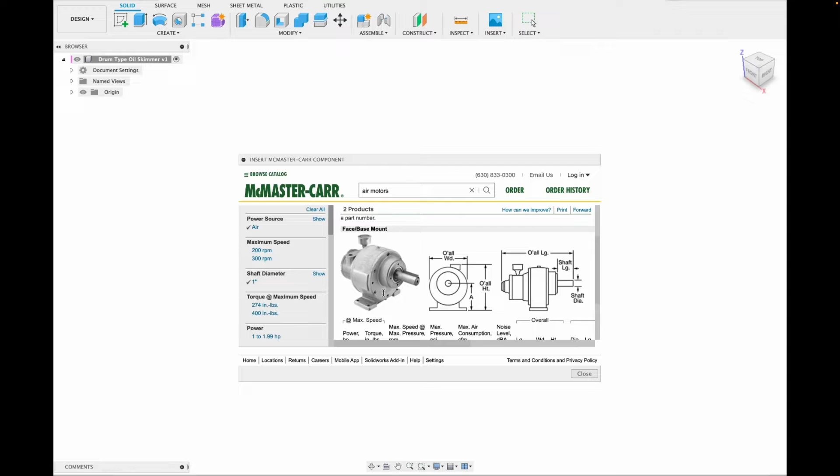So let's get started. I'm going to start off by bringing in an air motor from McMaster-Carr. I like to bring in parts, SAT files from their website. That way you don't have to model every nut, bolt, screw, etc. There's also other online libraries that you can use to bring in parts or components to speed up your iteration design process.

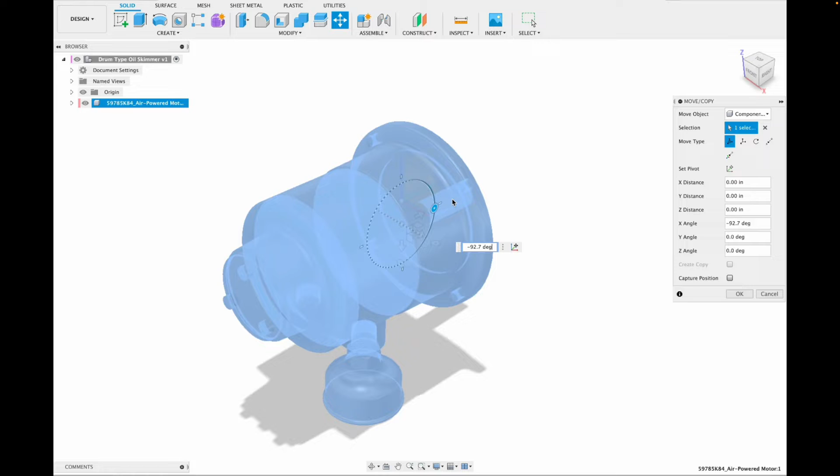So I'm just looking at the specs of this one. So yes, it is available as a SAT file. We'll bring it in, orient it how I want it. Obviously, we want the muffler at 12 o'clock. In the render tab, I'm going to go ahead and paint it just so it pops on the screen more. Like a glossy blue for now. And I'm going to paint the muffler black. Go back to design.

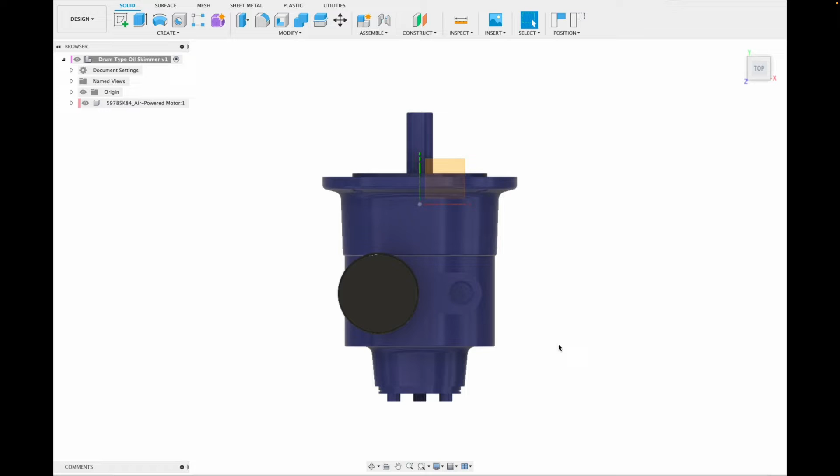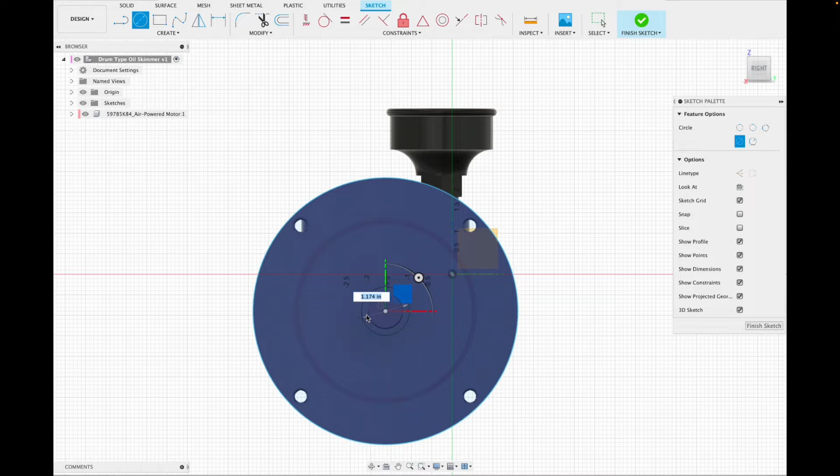I think I need to reorientate this air motor. And create a sketch on this face. What I'd like to do is create the actual metal mounting plate that this air motor is going to bolt to. Then we need to leave a circle for the shaft to go through the plate. Just taking a measurement. And create a rectangle using the center point. Pull out my rectangle. And we get 16 inches by 4 inches.

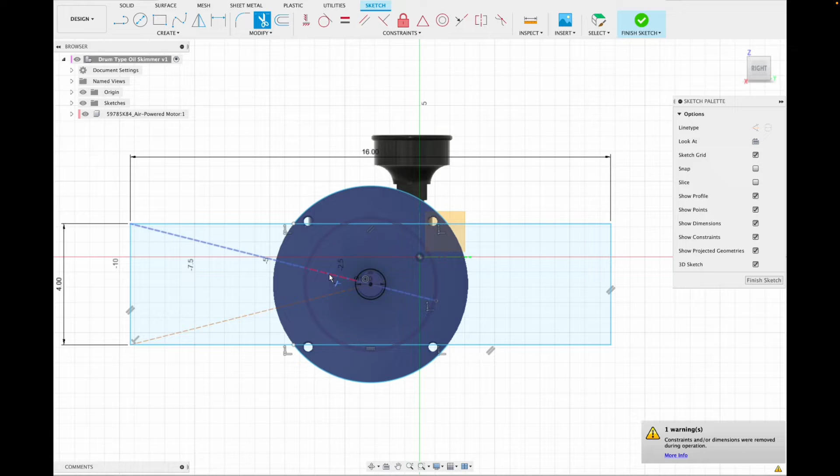And then using the trim tool, I'm going to remove my lines that I don't want. Excuse me. Then we'll say finish sketch, extrude. I'll select the parts we want to extrude, and we want a new body. We want it to be 0.25 inches thick. So there's our mounting plate. There's our mounting holes. You can see they're already pre-threaded.

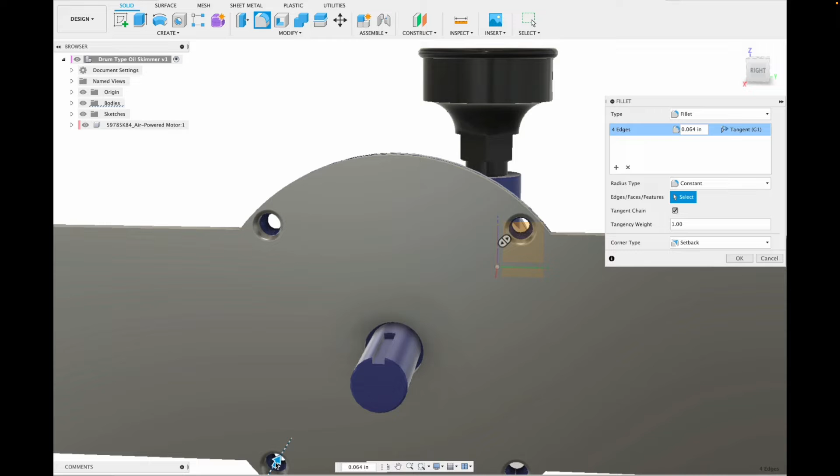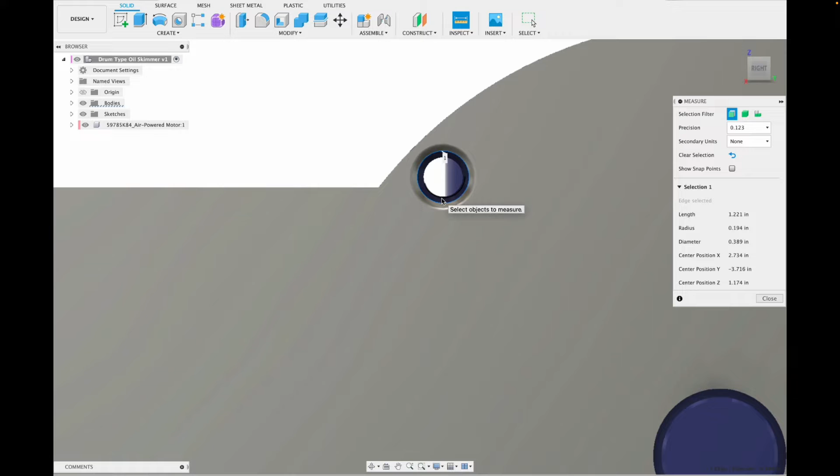I was thinking I may use countersink screws to mount the air motor to this mounting plate. Just taking a measurement. And then I'll bring in some mounting screws again from McMaster-Carr. They don't need to be very long. Flathead. Do hex drive. Because this will be exposed to water, I prefer them to be made out of stainless steel. See, they offer different sizes, different finishes.

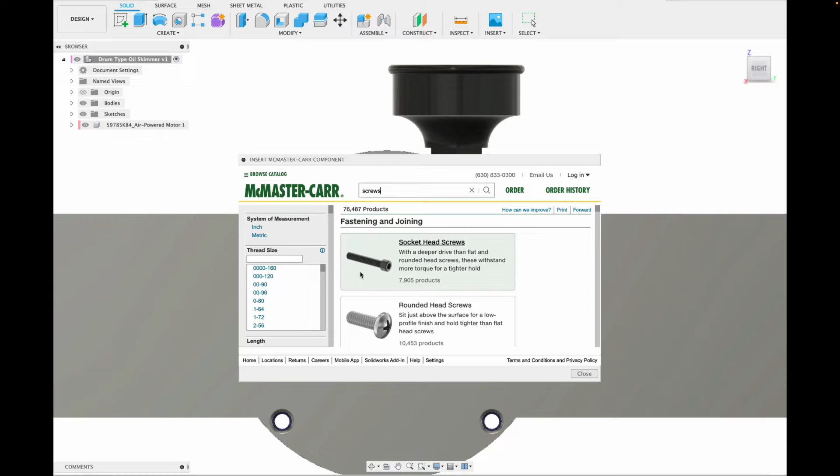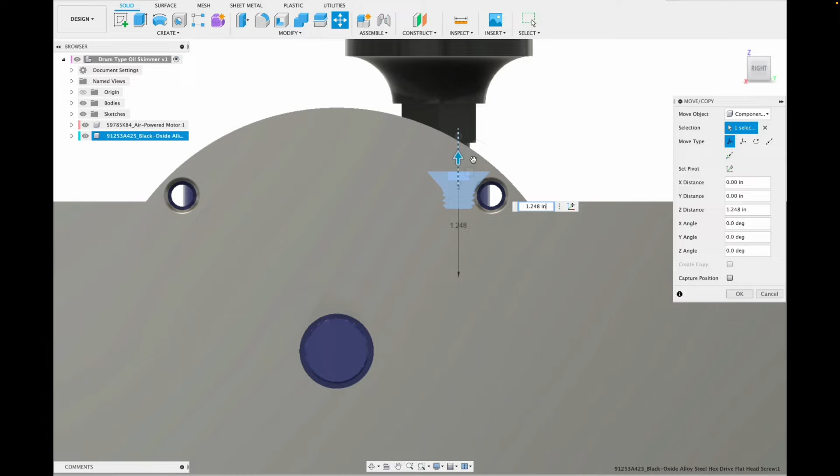That looks good. A little bit longer than what I want. Oh, and that's going to be too big. Let's delete that. The other thing I'm noticing on our mounting plate is I'm thinking there's not going to be quite enough meat or thickness between the edge of the mounting plate and the edge of the mounting bolt head. I'll show you what I mean here in a minute. So for example, even if we try to use this screw, you see how the screw is going to stick out over the edge of that mounting plate? That's no good. So we're going to have to go back into this sketch.

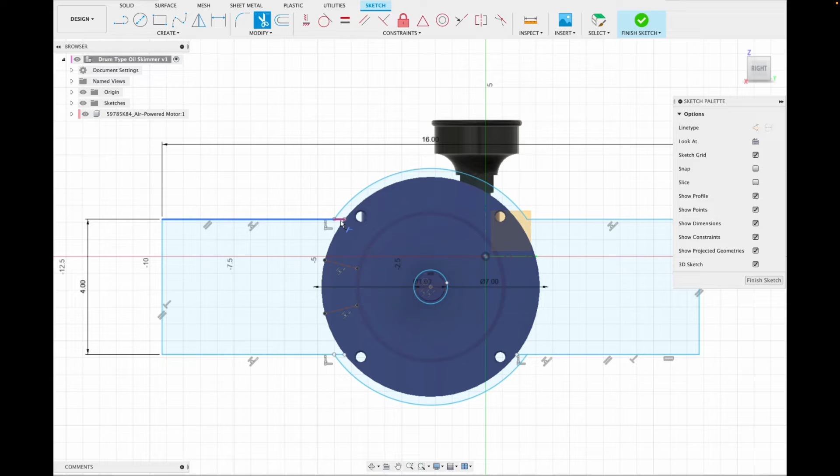See, edit profile sketch. And I'm simply going to add a larger circle to give more material there for the bolt head to tighten against, and then use the trim command to remove those lines and arcs I don't want. Finish sketch. Turn my sketch on, and then say extrude. And this body will delete. Now we can extrude. And again, I want new body, 0.25 inches thick. That looks better. You can see we have more material now for a bolt head to tighten against.

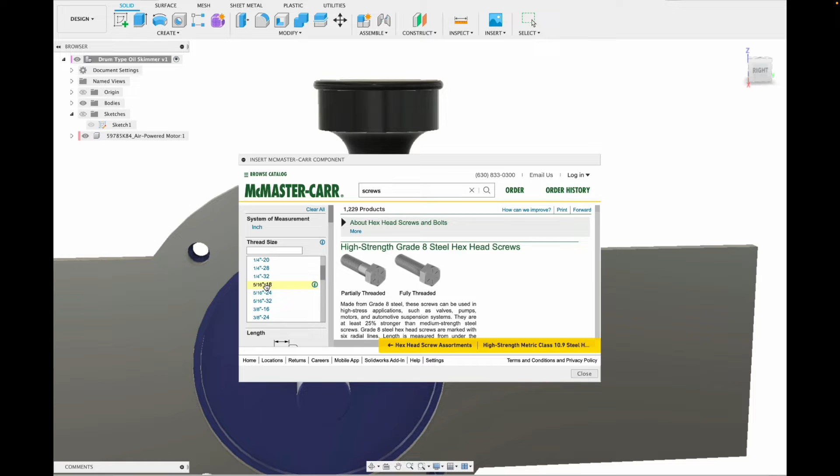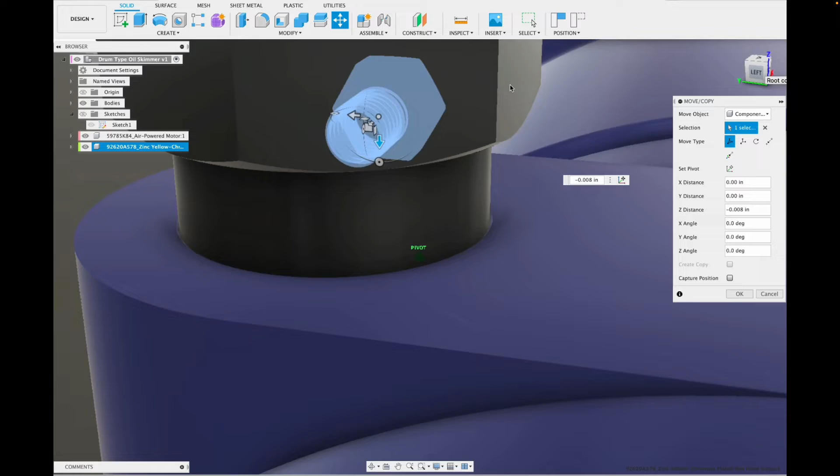And I'm just going to bring in a standard hex bolt. Yeah, that looks better. So we'll see how this looks. Yep. You probably could have grabbed one that's a little bit longer, but for this demonstration, you get the idea.

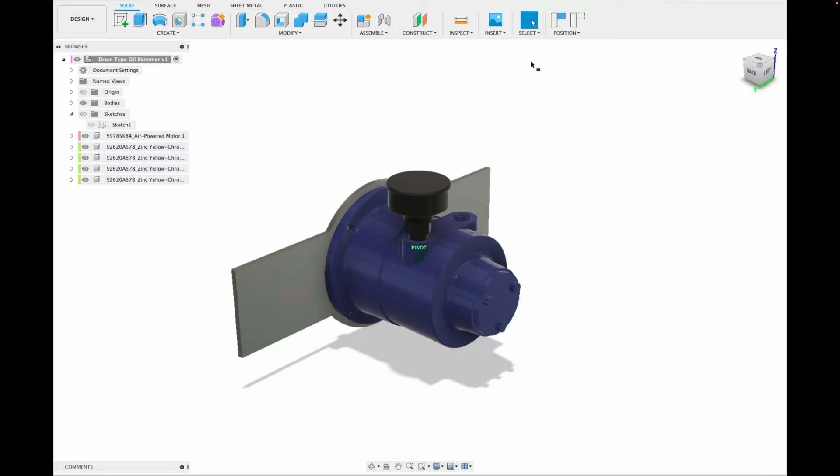Then we'll grab this one bolt and say create copy, move our copy over, get it aligned where we want it, say OK, and then we'll grab both of those two bolts and say create copy, drag them down to the other two mounting holes, and now our air motor is mounted to our mounting plate. That looks like it'll work just fine. Just taking some measurements now of the drive shaft and the keyway.

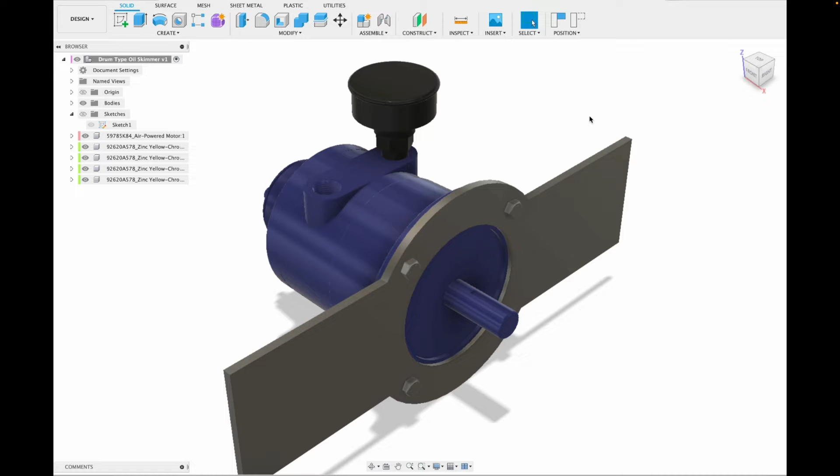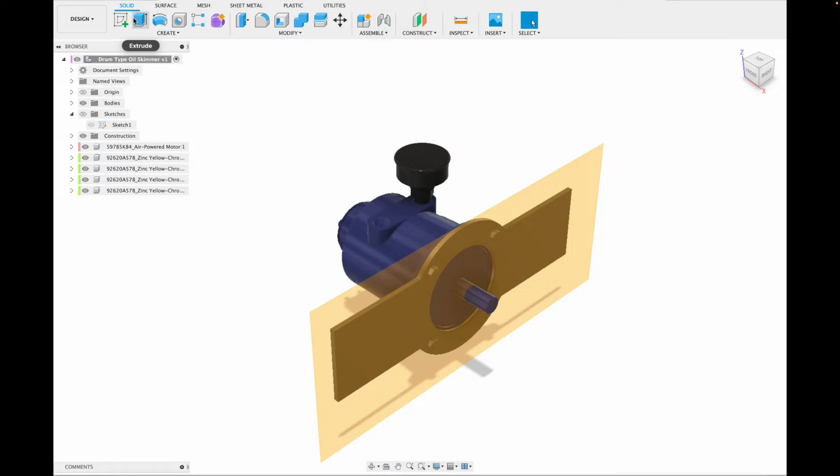Constructing an offset plane. And then I'm going to create a sketch on that offset plane. And we're going to extrude out our actual drum. So go over to Create Sketch, click on that offset plane. And we obviously need a hub with a socket that will accept the drive shaft. Extrude that out. So you can see that's how we'll connect to our drive shaft. Say new body. Okay. I'll create a sketch on that face.

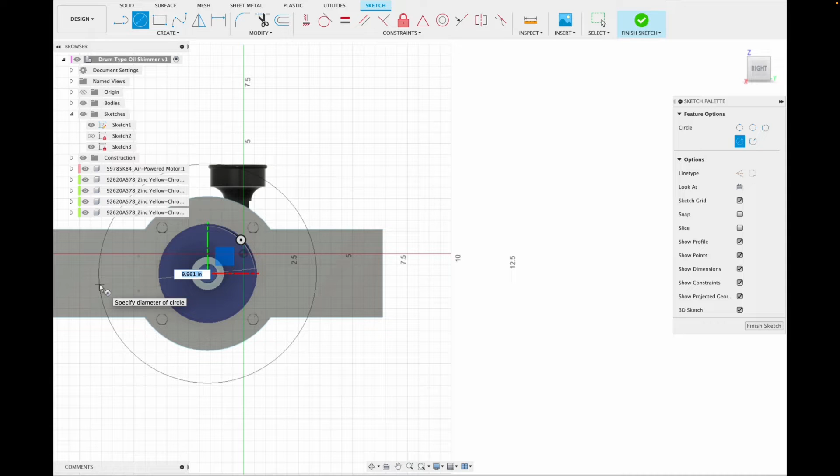Create a circle. And this will be our actual oleophilic material, the actual drum that will spin slowly on the surface of the water, and the oil will stick to the drum as the drum rotates. And that air motor is what's going to rotate our drum. Like 15 inches long. I think I'm happy with that. And later on, we'll go back and add some reinforcement gussets to that hub, between the hub and the drum.

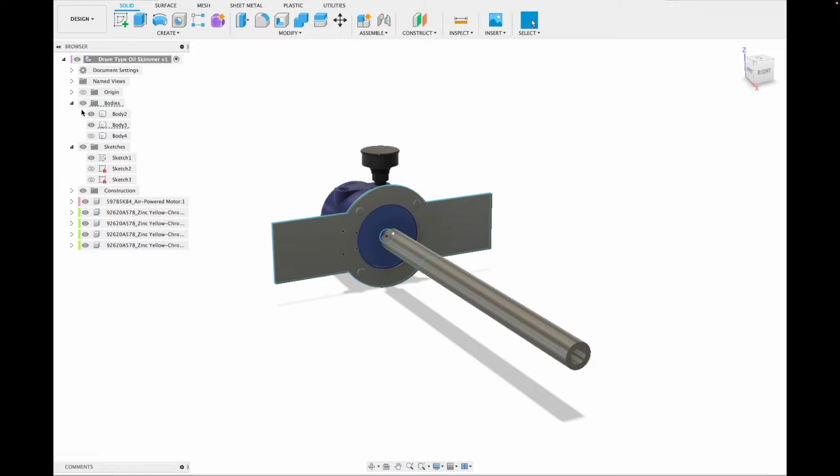I'm just going to extend that out so we have it poking out the other side. And on the other side, it's just going to be attached to a pillow bearing block. Add some color to it. This could be made out of stainless steel, polypropylene, some sort of plastic that's oleophilic. Continuing on, just taking some measurements. So you can use the extrude or press-pull command to shorten that hub. Say cut. If you see red like that, that means cut. So yeah, I think I'm happy with that.

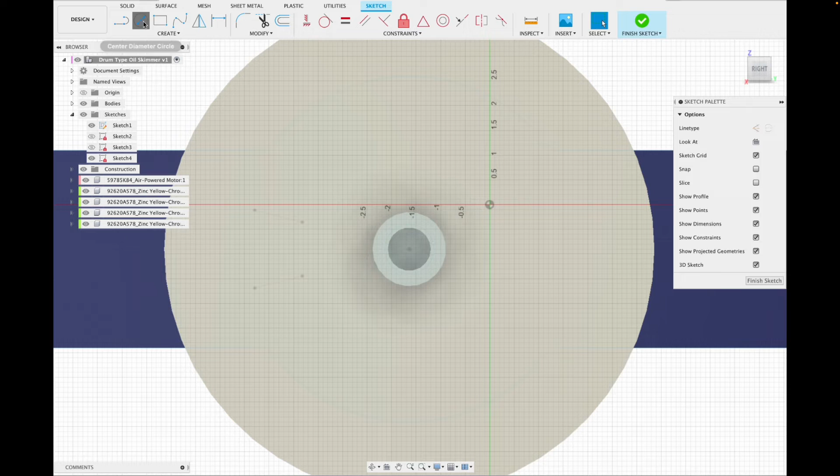I'm going to create a sketch on this face. And what I'm doing now is creating a shaft that will go through the pillow bearing block, because this is just the idler side, it's not the driven side. I'm simply going to copy this body to create my other mounting plate on the other side. There we go.

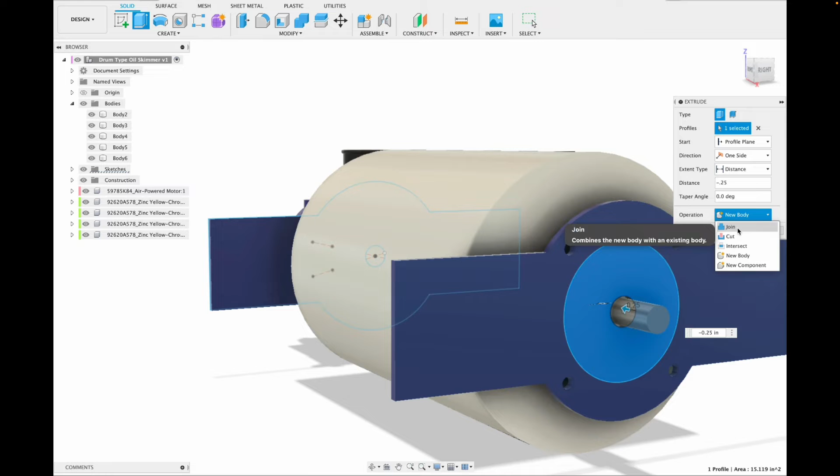Create a sketch in a circle, slightly bigger than the shaft to allow the shaft to go through. Then we'll fill in the larger circle. We'll use the extrude command, and at this point we'll say new body, 0.25, join. There you go.

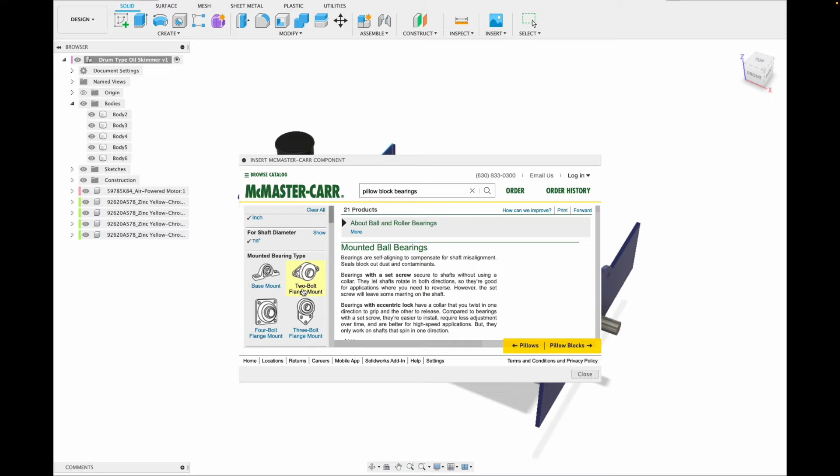So now we'll bring in our pillow bearing block, ideally made out of stainless steel, sealed bearing. We don't want water getting in. We'll orientate it how we want it.

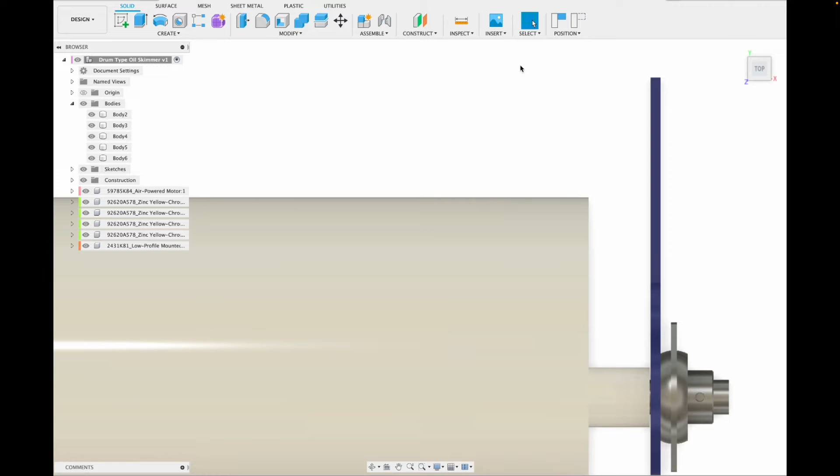Need to move it in slightly. There we go. Say okay. And then under the render, we're going to paint that pillow bearing block green for now, to make it pop on the screen.

I want to chrome plate our shaft and our Allen set screw. Yep.

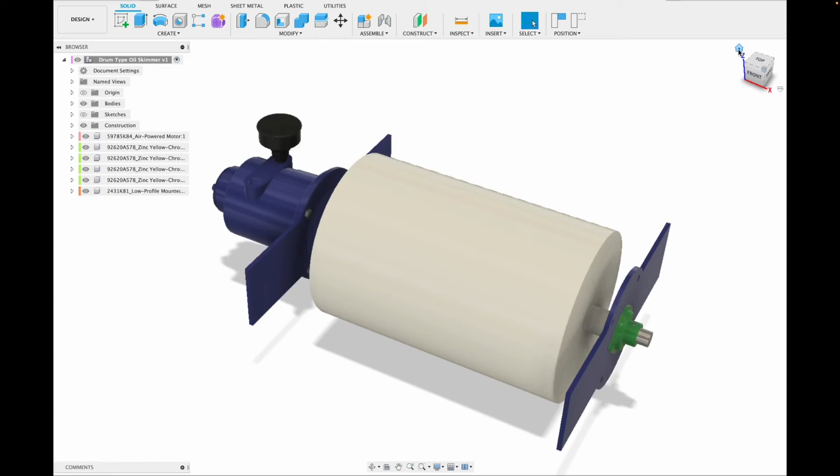Then we'll bring in 2 mounting bolts to mount the pillow bearing block to that mounting plate.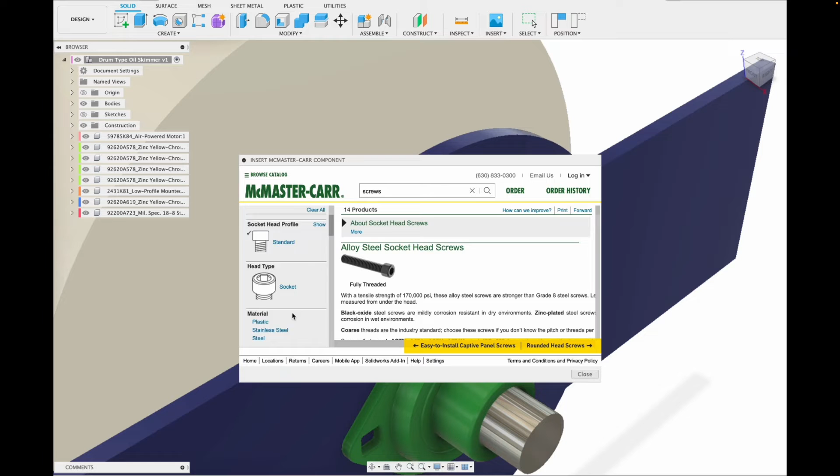Again, this one doesn't need to be super long. We're going with the socket head, stainless steel, so we'll drag that over and place it where we want it. Obviously we'd need to drill and tap that mounting plate if this was going to actually be built.

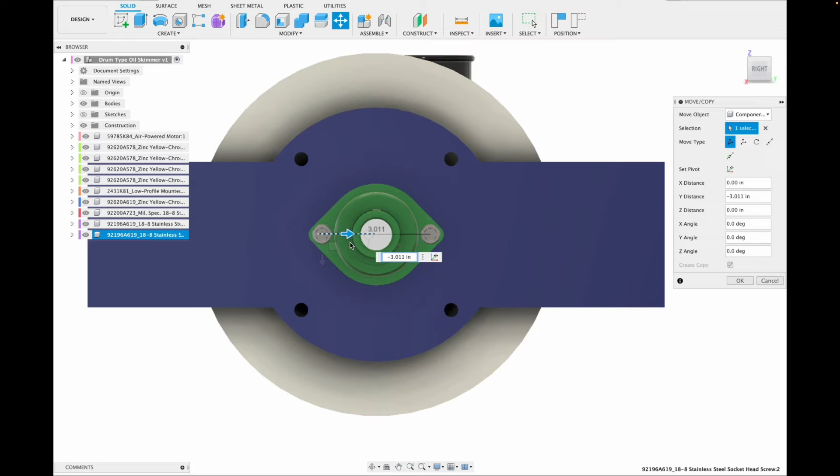So we'll place our first cap screw, right about there. Okay. Then we'll simply select that cap screw, say create copy, drag our copy, and now we have our 2 mounting bolts. That'll work.

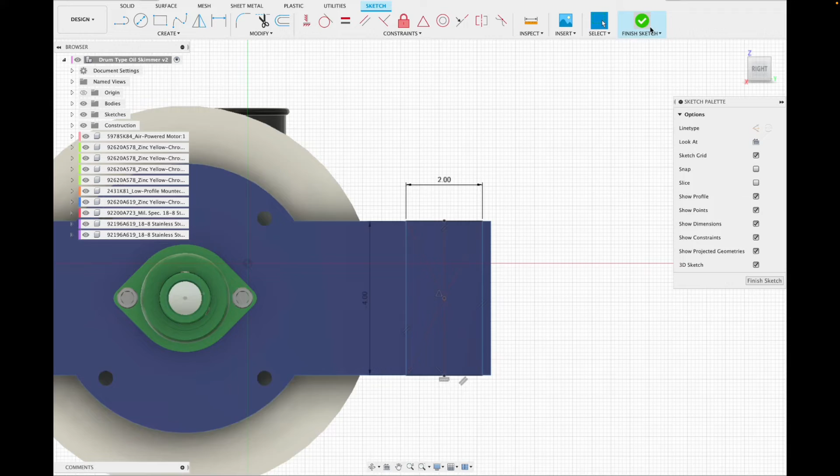I'm going to create a sketch on this face, make a rectangle, and we'll extrude this rectangle out. That'll become this cross member that'll be welded to the either side plates. And render, we'll paint it blue.

There we go. The other cross member, I want it to be removable. I do not want it to be welded in place. So I'm going to create some mounting plates.

And then we need to extrude out an oil collection tank to receive the oil that is going to get squeegeed off of the drum.

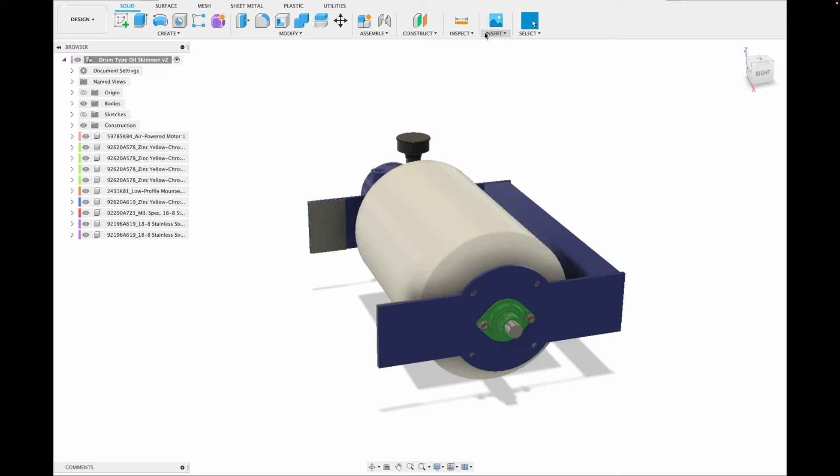Extrude that tank out. Then I'll use a shell command to open it up, and there's our tank. Woo!

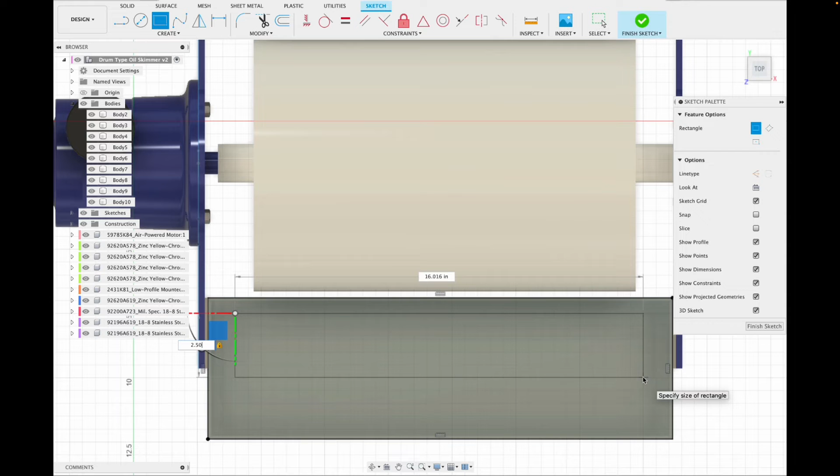I'll create a sketch on this top face and essentially create a lid for the tank. But then I want an opening in that lid, and that opening is where the oil is going to flow into the tank.

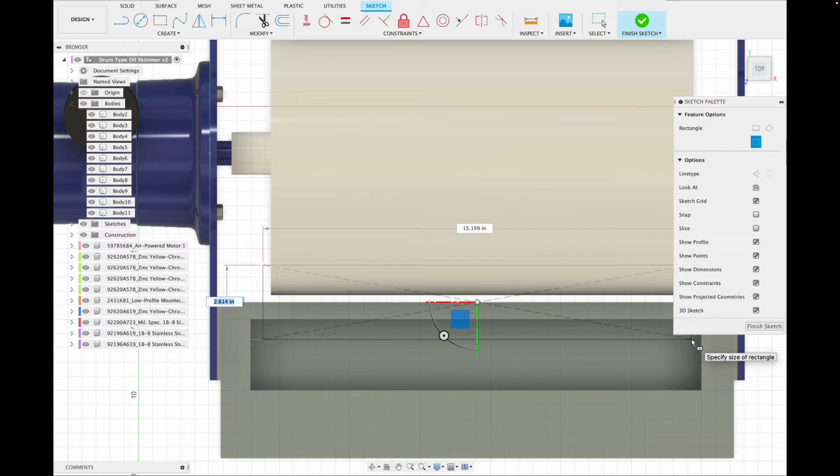Now we'll think about creating our squeegee. The squeegee will ride on the surface of the drum, so as the drum slowly rotates, the oil will get squeegeed off and flow into our oil collection tank. So the squeegee needs to be at an angle, right about there.

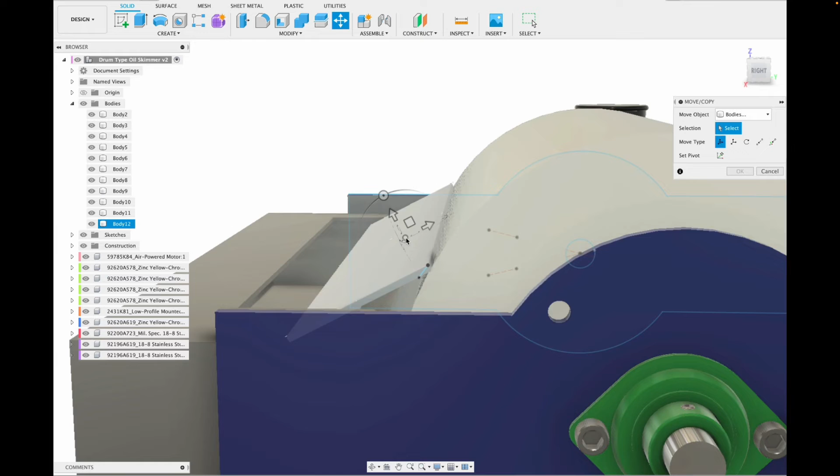Create a sketch on the side of the squeegee so I can create that sharp profile so it better aligns with the drum, because I don't want that large gap — if the oil hits that curb, it's going to create problems. I want a nice seamless transition between the squeegee and the drum so the oil can flow easily into the tank.

We'll paint it yellow just to make it stand out more, and paint the air motor red. Yeah, I like that.

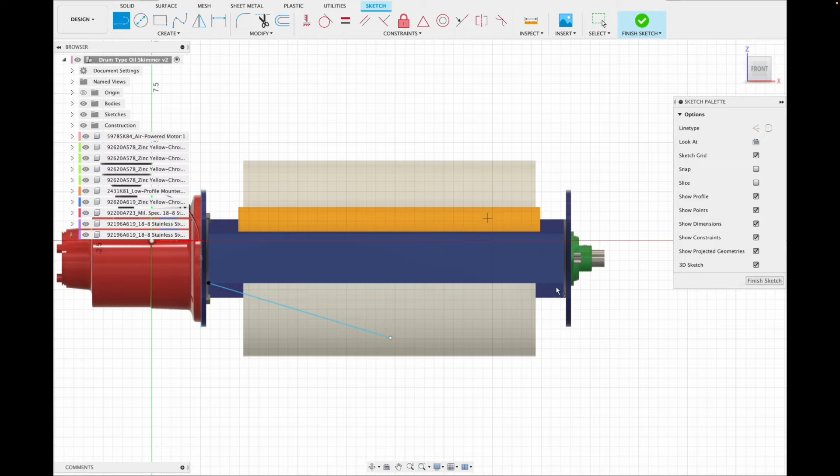And I want to add a body to the bottom of the collection tank to help facilitate the drainage of the oil down toward the center bottom of the tank. There we go.

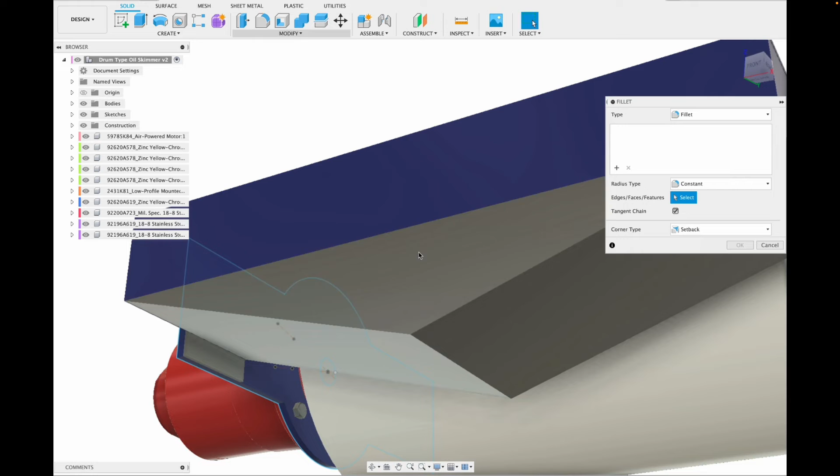Thinking about putting a slight bevel on that. Under render, we'll paint the whole thing blue.

And I'm going to add a swivel NPT coupler for the outlet on the oil collection tank, so that as this thing floats on the surface of the water, that hose can relax and swivel and it doesn't bind up.

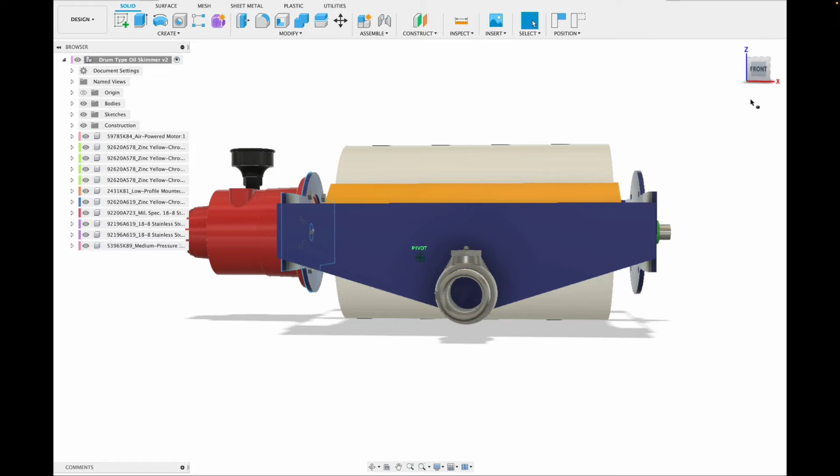You can see this one's nice — it has a grease fitting to grease that swivel fitting. Just want to see proper placement. This one is 1.5 inch diameter. We probably could have gone with like 1 inch or 1.25 inch NPT, but that's okay.

Extruding out a hole. And we'll paint that swivel fitting red. Yep.

Create a sketch on that face, and I want to machine off some of that material that sticks inside the tank. Yeah, that's better. Whoops.

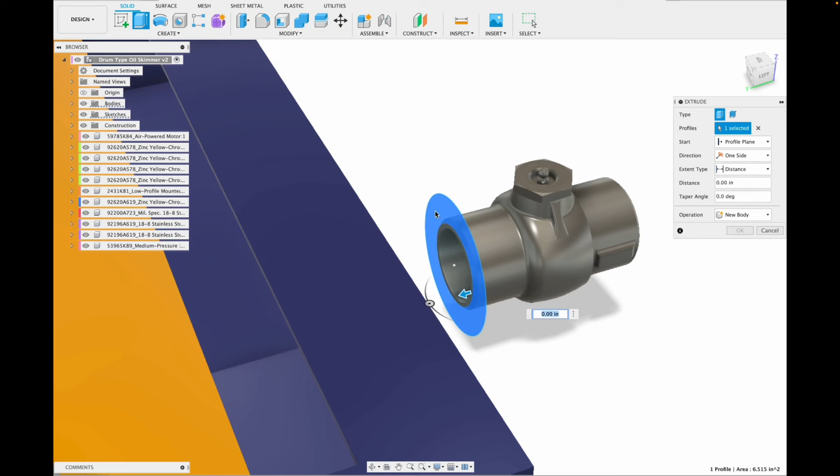So I'll just move it out of the way, machine off the material I don't want. And this side of the fitting would obviously get welded to that oil collection tank. Yep.

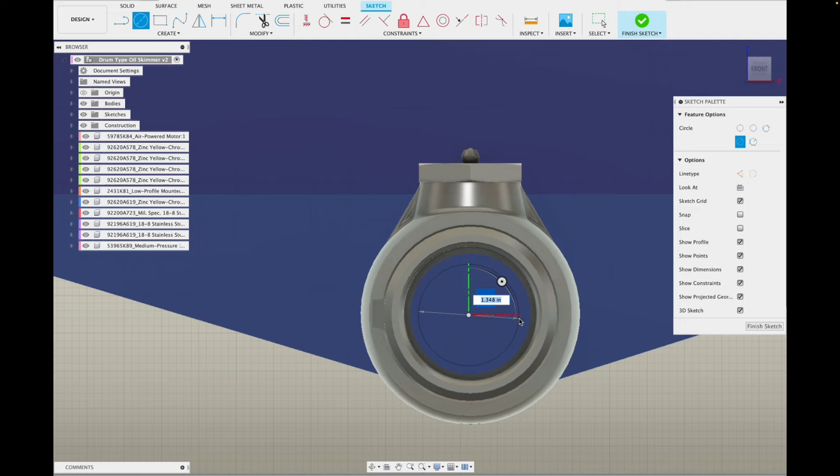Just aligning everything up. And we'll create a sketch, make a hole. There we go.

Then we'll go back and paint that swivel fitting red.

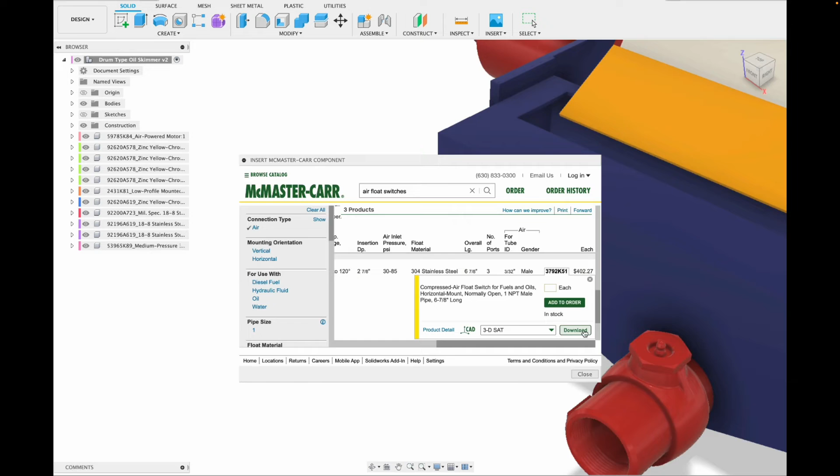Now we need a pneumatic float switch, and it will be attached to the inside of this tank. As the oil level rises inside the collection tank, the pneumatic float switch will float up and allow air to flow to a pneumatic diaphragm pump that would be mounted on shore or on a barge or a ship. Once the float switch floats down, it would shut off airflow to that diaphragm pump.

This would thread into the side of the collection tank. Paint it red and stainless, chrome.

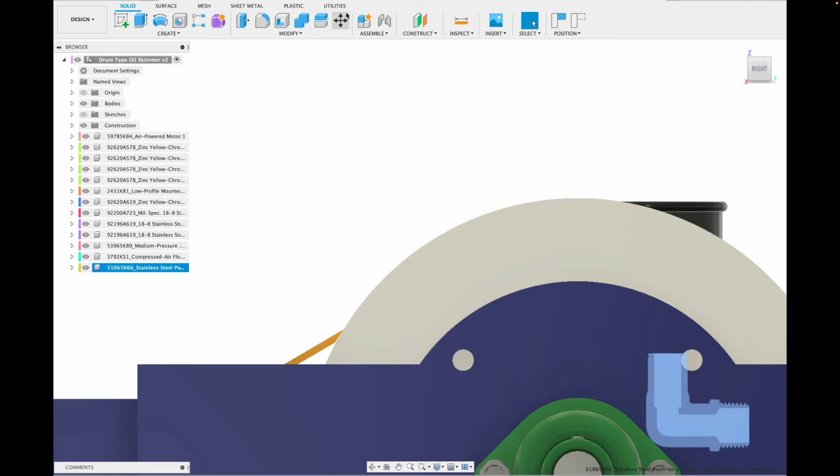And I want a swivel fitting to mount, a 90-degree swivel fitting to mount to the air inlet on the air motor. Again, using a swivel fitting, so as this unit floats around on the surface of the water, the air supply hose can float around and swivel and pivot and not get kinked or bound up. That's 1/2-inch NPT.

Under render, add some color. Yep.

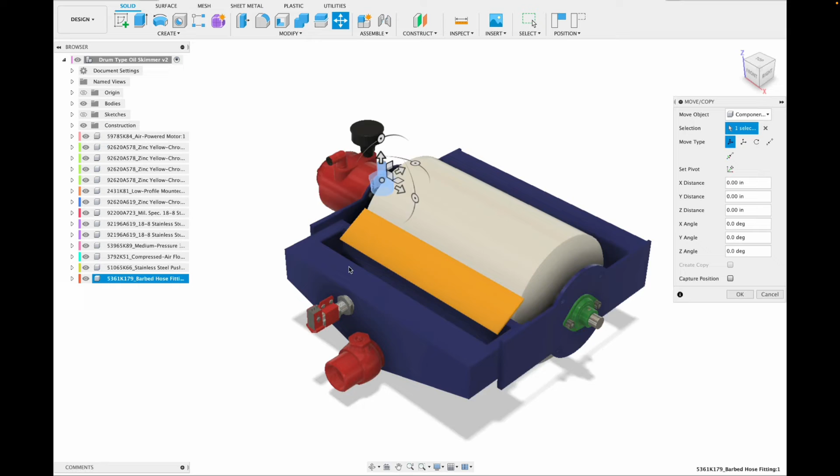And then I want to add an NPT to barb adapter. And that one looks like the barb is a little bit too small for what we need.

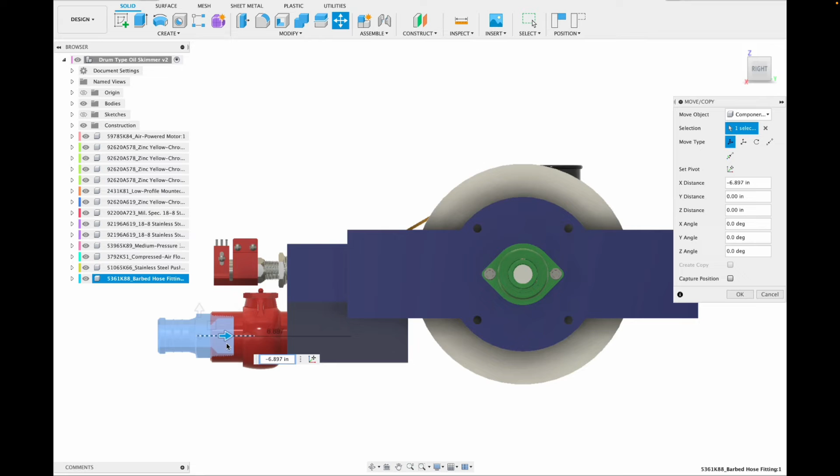Yeah, we don't want our suction hose to be too small a diameter. We also don't need it to be too large and heavy and stiff. We still want to maintain good oil flow to our diaphragm pump, that's going to pump the oil out of that collection tank.

Then we'll create our suction hose, paint it black. Then we'll create a sketch on this face and extrude out our air line, paint it black for now. Then we'll create a shell so you can see that it's a tube or a hose.

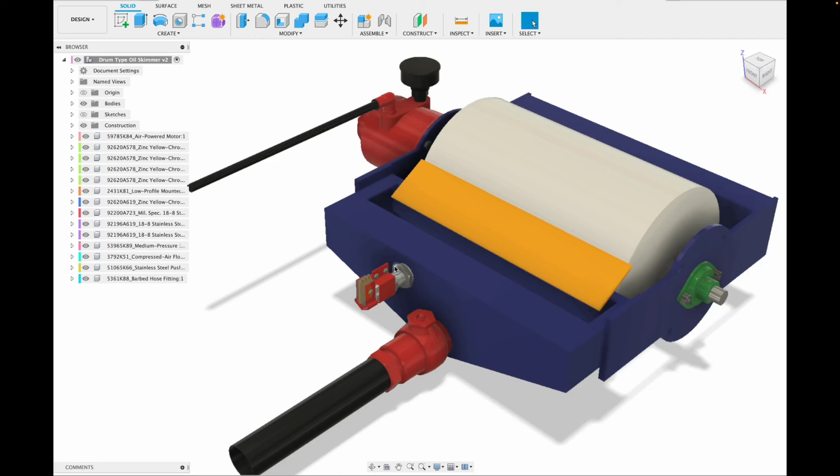Then I'll create an offset plane and simply draw 2 lines and an arc. I'll create a fillet or a bevel there, that corner, radius it. Then we'll use a pipe command, say new body.

There's our first air hose. And then we need a second air hose to that float switch.

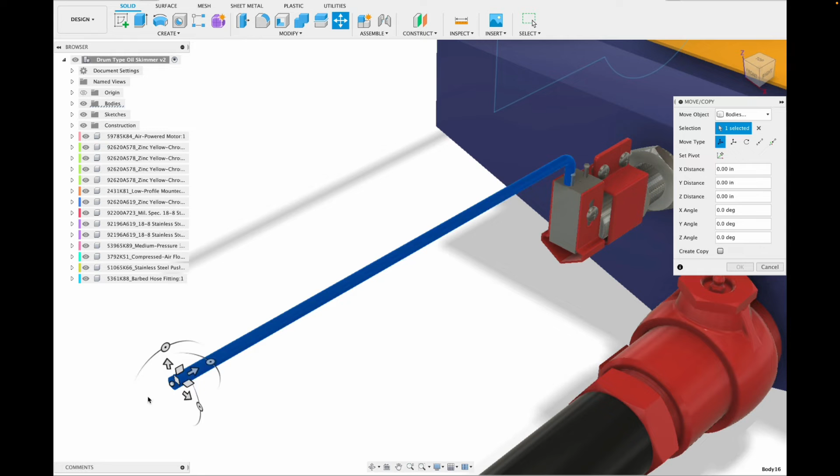I just want to get rid of this center. There we go. I'll extrude it out, select it, create a copy to make our second air supply line. One is air going in and one is air going out.

And again, that's what controls the diaphragm pump that'll pump the oil out of the collection tank. Extrude that out. Okay.

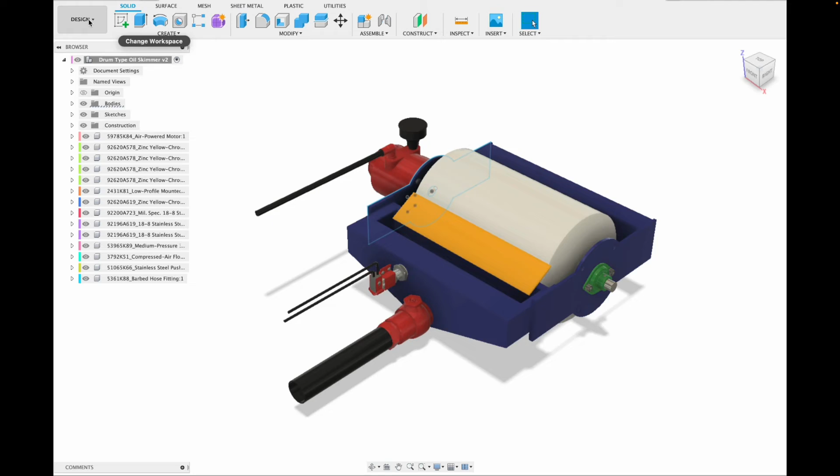And I like to differentiate the air lines as green. Yeah, and then that bearing will be red. Yeah, that looks better.

And then we need to add some mounting bolts that actually bolt the oil collection tank to the mounting plates on the side.

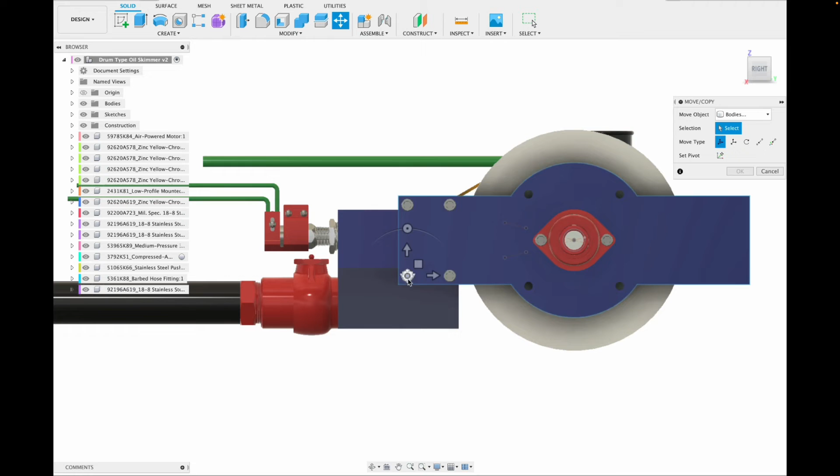And then we'll need to think about installing some floats or buoys. I guess floats would be the more appropriate term, to mount to this unit to help it float correctly on the surface of the water.

So I'm going to create a sketch on the bottom of this rectangular tubing. Say finish sketch, extrude.

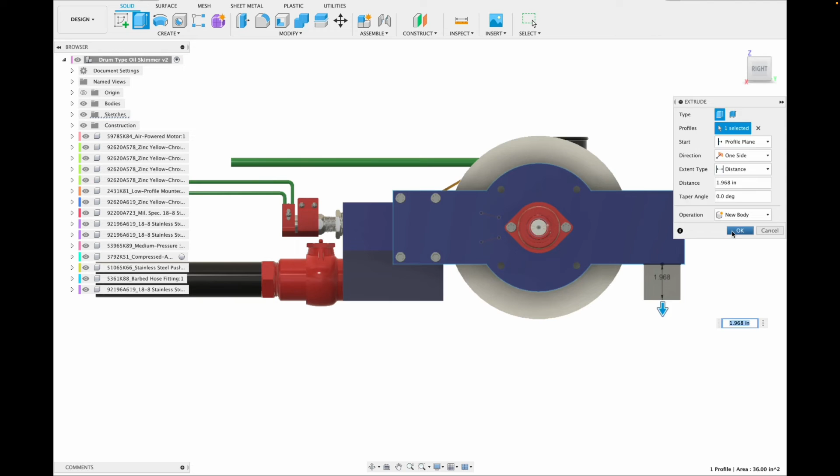We can always extrude it more if we need to in the future. I'm just going to put a bevel on these edges. We'll paint it yellow. So there's our first float.

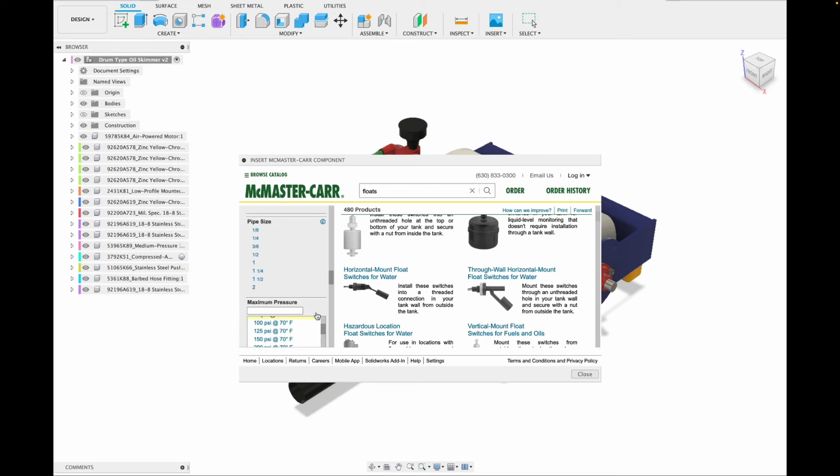So kind of like a pontoon boat. And then I want to add a float to the actual discharge hose because it's so large and heavy.

We'll paint that yellow. Move it up a little bit.

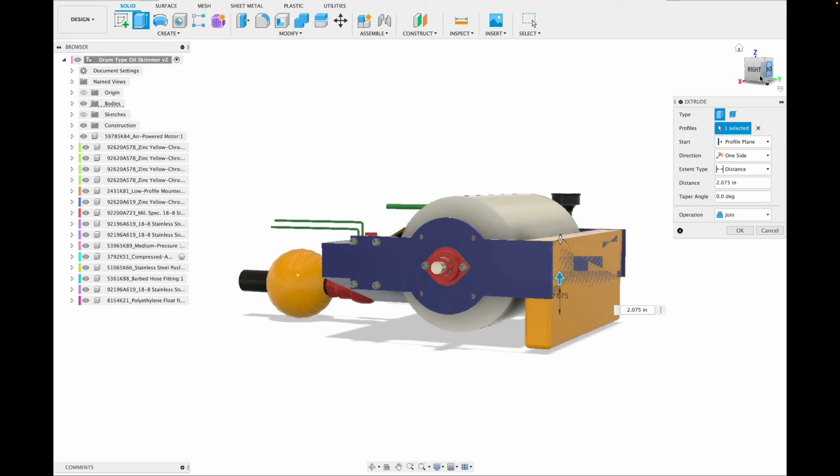And yeah, I do want to lower this front float down a little bit, so we'll just extrude this face. Like so. That's pretty much it.

You can see the float inside our oil collection tank there. It's a better view. I'm going to create a tangent plane.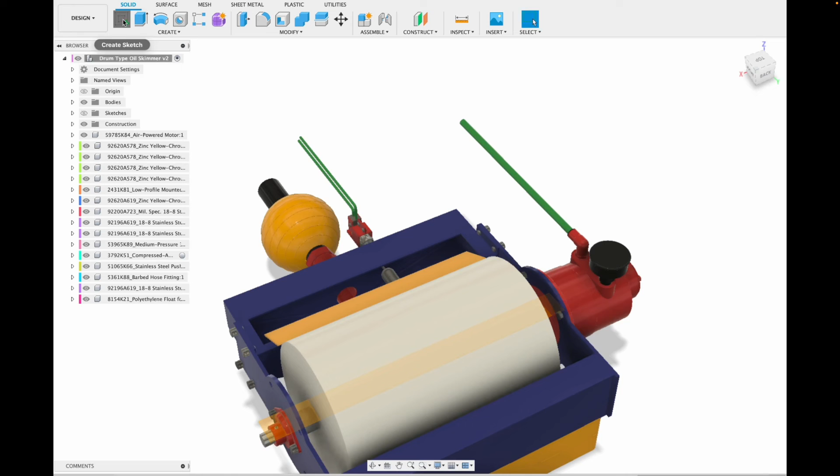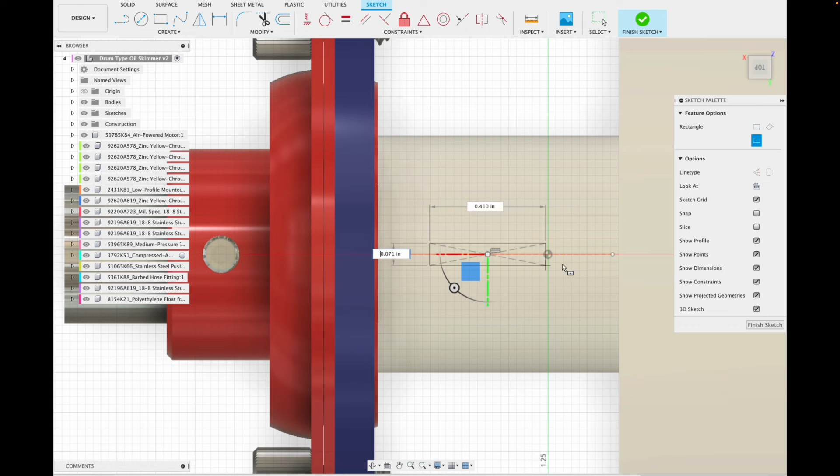And I'm going to create a rectangle that we will extrude up and turn into our gussets. We want to be able to add structural integrity or support to those hubs.

Then we'll say extrude, we'll pull it up to about where I want it. New body.

Then we'll create a sketch on this face and simply draw a diagonal line across that face to turn it into an actual gusset here in a minute.

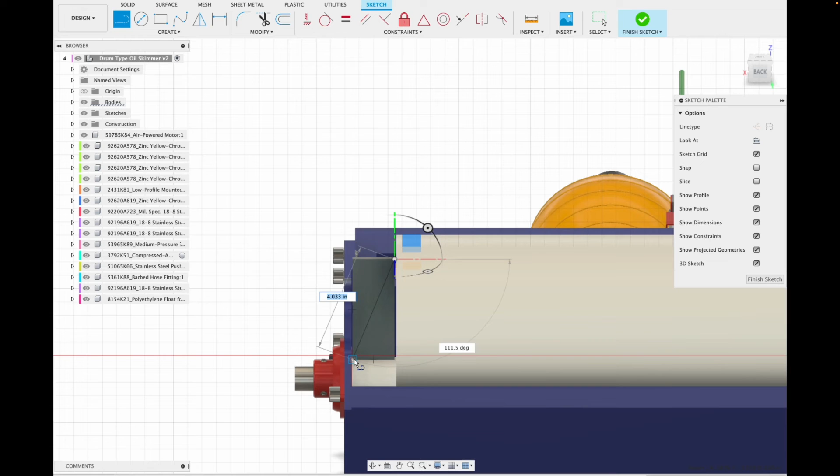Then we'll use extrude, cut to remove the material we don't want. Yep. Say OK.

And place it where I want it. Under render, we'll paint that white so it all looks like polypropylene or an oleophilic plastic.

Now I'm going to create a pattern. So instead of having to 3D model every single gusset on both sides of this drum, I just create the one gusset and then create a pattern of that gusset.

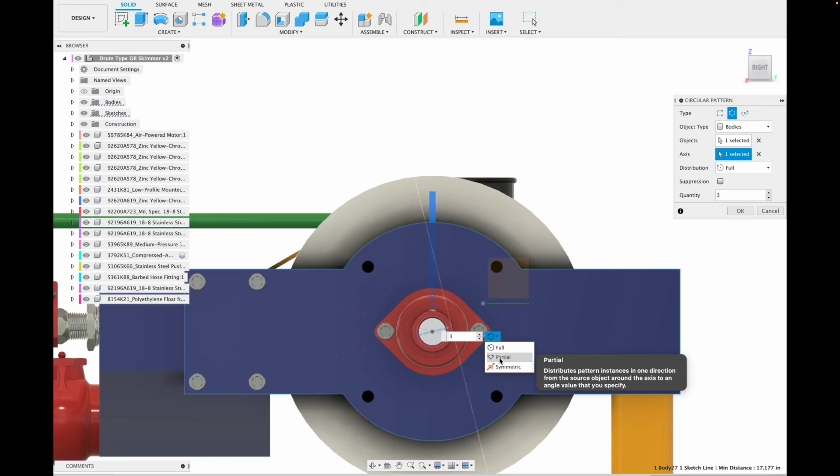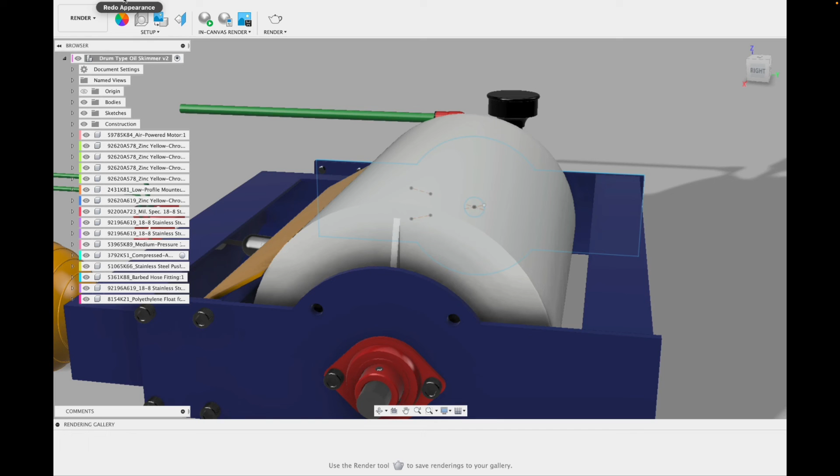It's not quite where I wanted them to be, so I'm going to try something different. So again, we'll go create pattern, pattern on path.

We'll select that body, that'll be our path. And drag that arrow and say path direction. There we go, that's better.

So there'll be 3 gussets on each side of the drum.

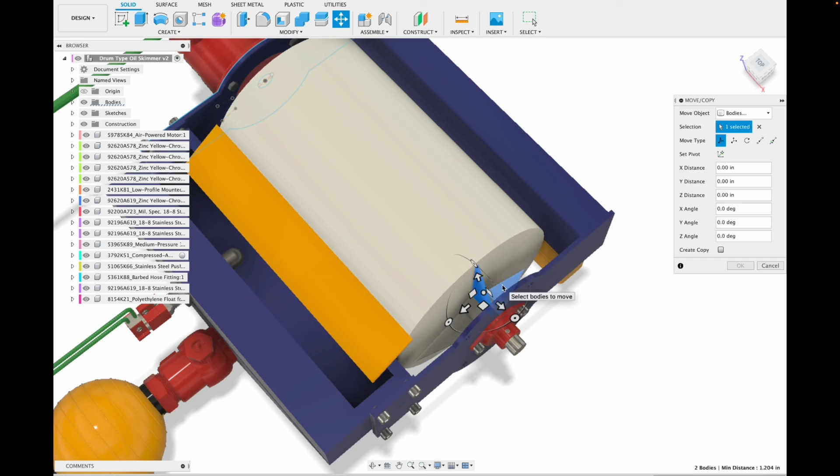Yeah, that looks good. And then we'll select all 3 gussets and say create copy, and then move our copy to the other side.

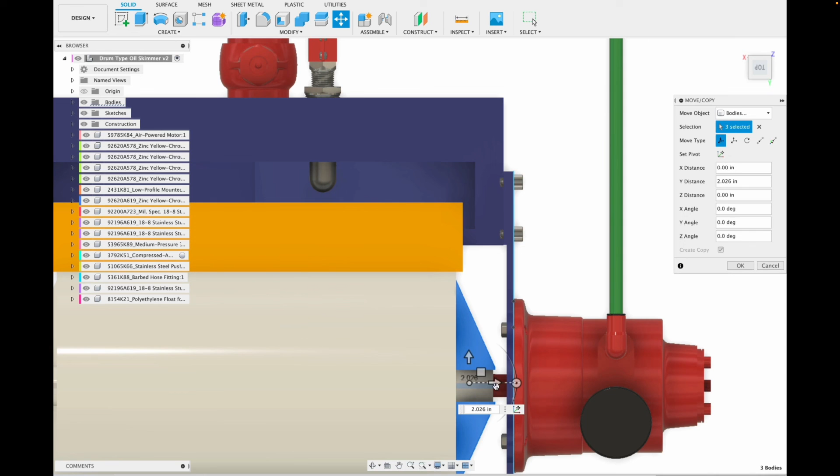So for example, if this drum was made out of polypropylene or really any plastic, the way I would fabricate this would be with plastic welding.

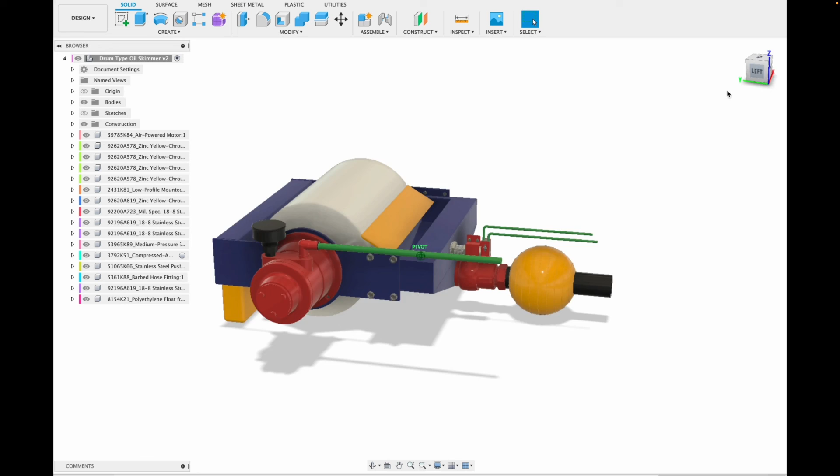Pretty much it. See the bottom view. Yeah, I think I'm happy with that.

I hope this tutorial helps you with your 3D designs.

Here's sort of a final view of our finished product. Again, we have our front view, back view. You can see we have our squeegee, our air motor, our pneumatic switch,

float switch, our swivel fitting, our floats, pillow bearing block, the main frame, discharge hose, air supply hose for the air motor, air in to the float switch, and of course air out of the float switch.